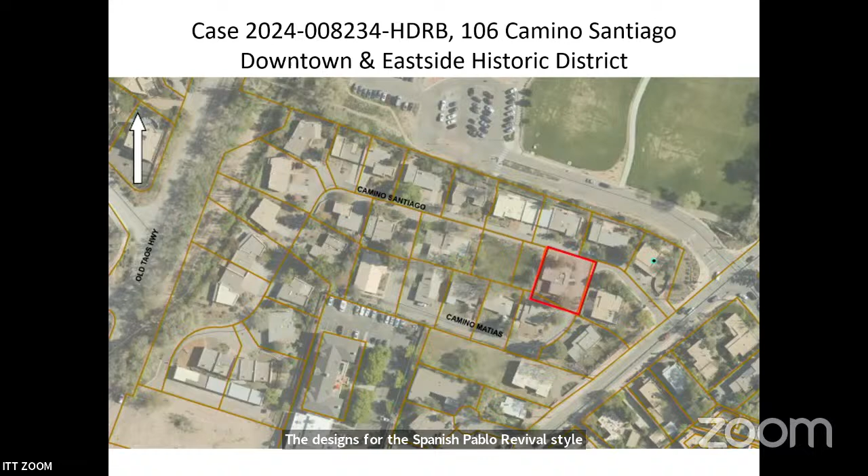106 Camino Santiago is located in the Plaza del Monte compound in the northeast section. Plaza del Monte is a unique compound in the downtown and east side historic district. The communal living center was originally developed for retired members of the Presbyterian Church, starting in the late 1950s until 1977. The designs for the Spanish Pueblo Revival style buildings, with mid-century modern design features, are from Clark and Register.

The circa 1965 residence at 106 Camino Santiago was constructed as part of the independent living section of Plaza del Monte, and is likely the 3rd unit to have been constructed. The contributing structure is a 2,301 square foot L-shaped residence with a portal that wraps around the north and east elevations, and has an attached carport on the southeast corner. The structure is flat roofed with a stucco chimney in the northeast corner. The portal is constructed of vigas sitting on square girders held up by round posts with zapatos-type corbels.

Small rectangular windows penetrate the bedroom wing. The remaining windows vary, including large picture and grouped casement and sliding units. The house is finished with textured cementitious stucco in a light brown tone, and white paint under the portal. There's a small courtyard in the southwest corner of the residence, and the residence represents the original Clark and Register design template for the Plaza del Monte retirement homes.

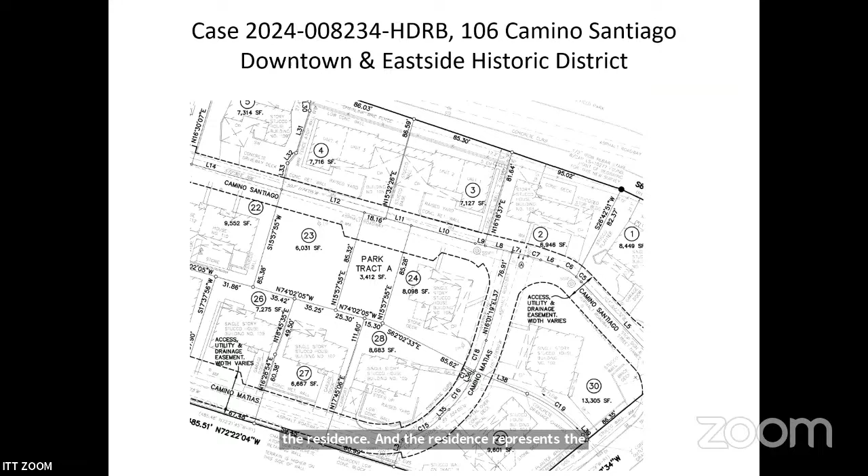The residence came before the HDRB under case H-19-098A for a status review, and was designated contributing because the structure is a good example of mid-century modern Santa Fe style, and because of its association with Plaza del Monte, a master plan community by architects Clark and Register. The north and east elevations were designated as primary under the same case, and approval to re-roof the residence was issued in January of 2024.

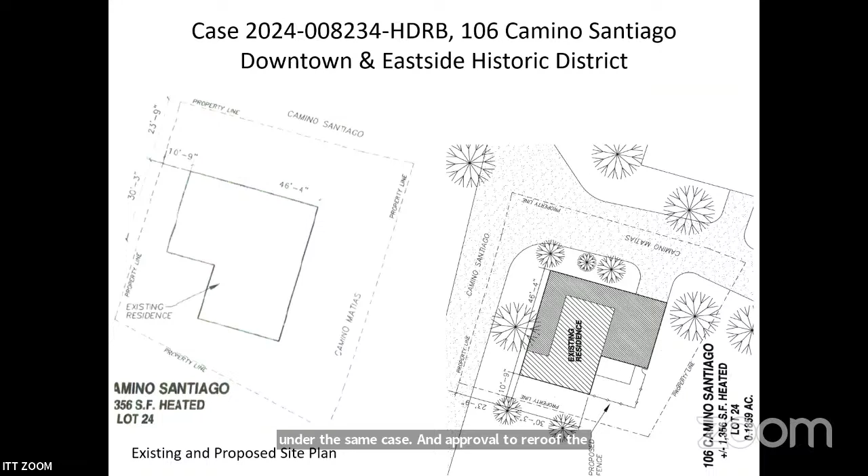The applicant now proposes the following exterior alterations.

We will replace all windows with sliders. The proposed windows have a single center vertical mullion with bronze trim. Window fenestrations will remain the same except for 2 windows, one on the west and one on the south. These 2 windows will be increased in size to meet egress requirements. The new egress windows will not have the same muntin pattern as the long narrow windows on the west elevation.

Several existing windows are non-conforming with greater than 30-inch light openings. These will be maintained in all windows except the egress windows, where the light openings will be increased. An exception is requested to replace windows on a primary facade per section 14-5.2D5AI.

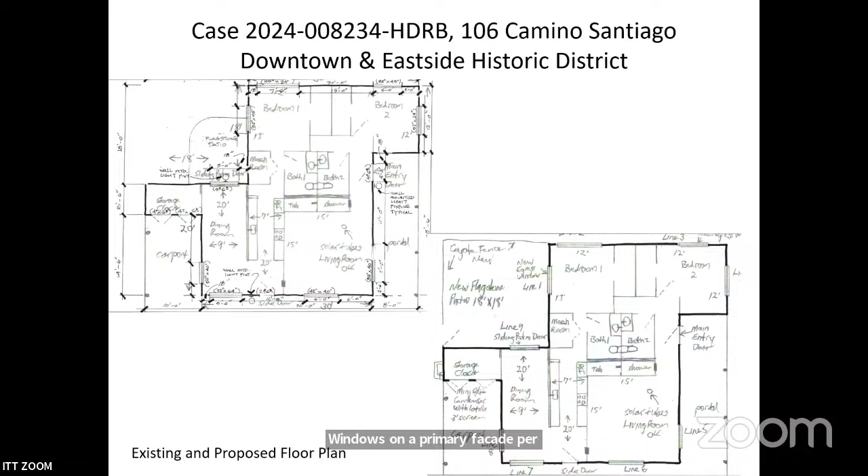They would like to replace the east elevation exterior 3-light panel door and the single pane glass sliding rear patio door on the west elevation with similar styles in bronze color.

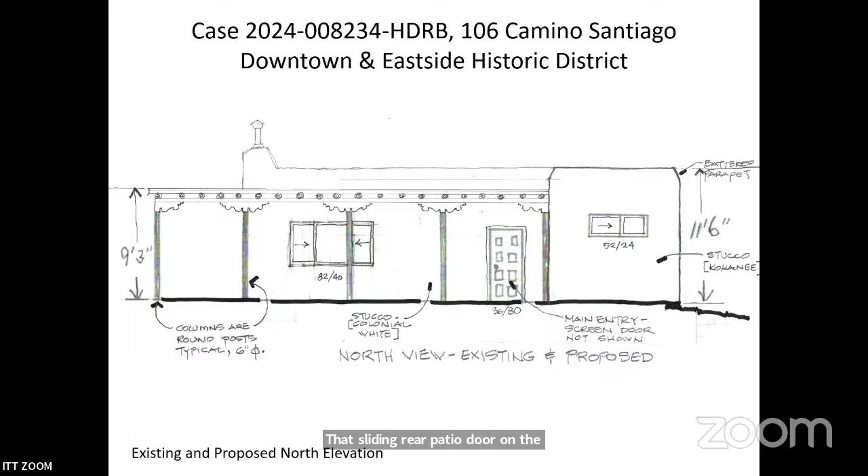Replace the 14 columns on the portal with 6-inch by 8-foot posts stained in dark brown called Cabot Gold Midnight Mahogany. An exception is requested to remove historic material per section 14-5.2D5B.

Repair the vigas of the portal using epoxy and staining to match the existing color, and they will retain the round shape.

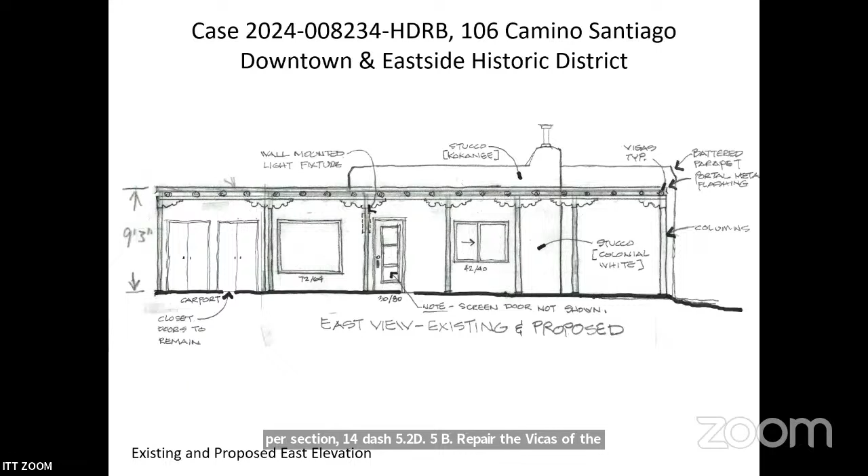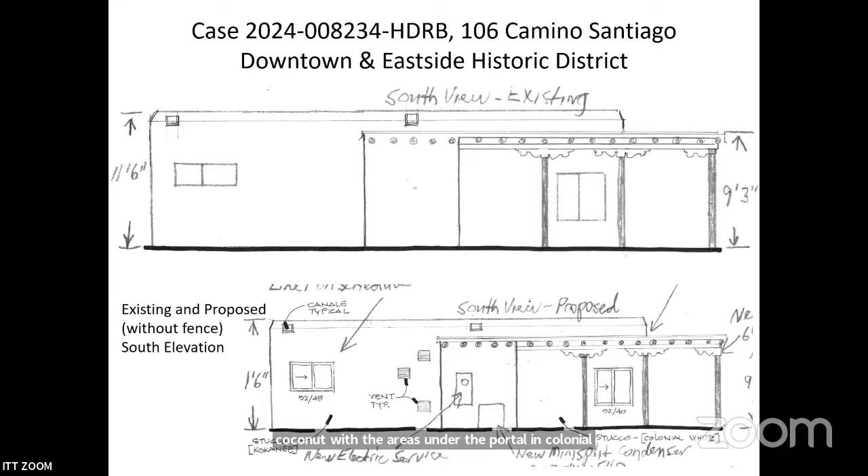Stucco the residence using La Habra cementitious kokanee, with the areas under the portal in colonial white to match the existing colors. Install a 324 square foot flagstone patio in the southwest corner of the residence in Colorado red flagstone.

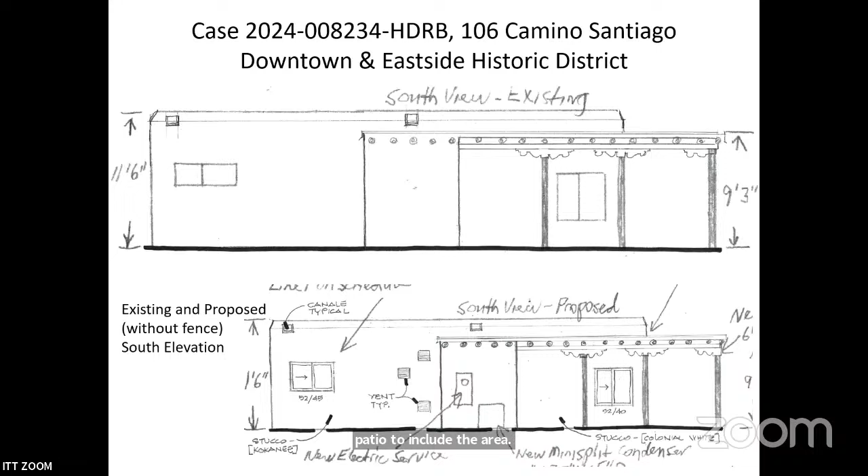Construct a 5'6" or 66" fence with a pedestrian gate along the south and west edges of the patio to enclose the area. The fence and gate are at the rear of the residence, where the maximum allowable height is 30 inches or 2 feet 6 inches.

They would like to install a ground-mounted HVAC condenser on the south of the residence and install a 3-foot-high coyote fence around the proposed HVAC condenser to conceal it from public view.

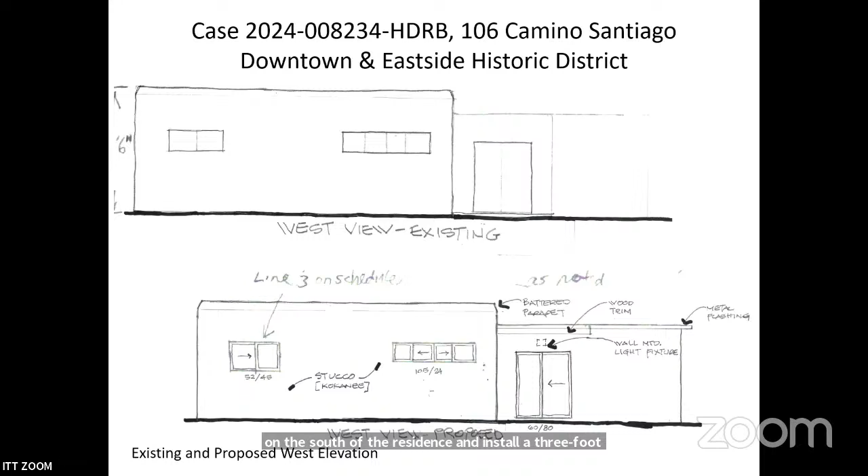Staff finds that the exception criteria have not been met for the replacement of the portal columns, and staff finds that the exception criteria have not been met for the window replacement, but the board may find that they have upon further testimony.

Otherwise, staff recommends approval of the application as it complies with 14-5.2D, general design standards for all H districts, and 14-5.2E, downtown and east side design standards. I stand for questions. Thank you very much.

Clarification: the present windows are wood windows, is that correct? Yes. And was there a window evaluation and what was the conclusion? There was a window assessment by Scott Cherry, and he found that all of the windows were in workable condition. They could be repaired. None of them were in bad enough condition to need to be replaced.

Today on the field trip, I did feel that some of the windows were in very good condition, actually. Would you agree with that? Yes, the report states them as all in excellent condition.

And is the applicant wanting to replace them with metal clad as opposed to wood? I can ask the applicant when he comes forward. Yes, please. I'm sorry. That's okay.

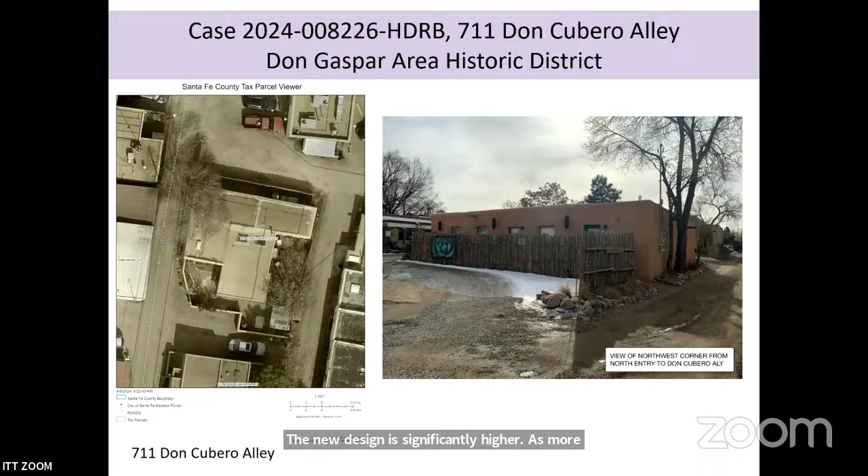Here we have the overview photo, the north elevation wall with coyote fence, and the east elevation with the coyote fence. The applicant is proposing, as a retroactive application, the construction of this 6-foot coyote fence on both the north facade and the east facade. Here we have the elevation of the south elevation showing the sunroom, and the west elevation showing the block wall into their courtyard.

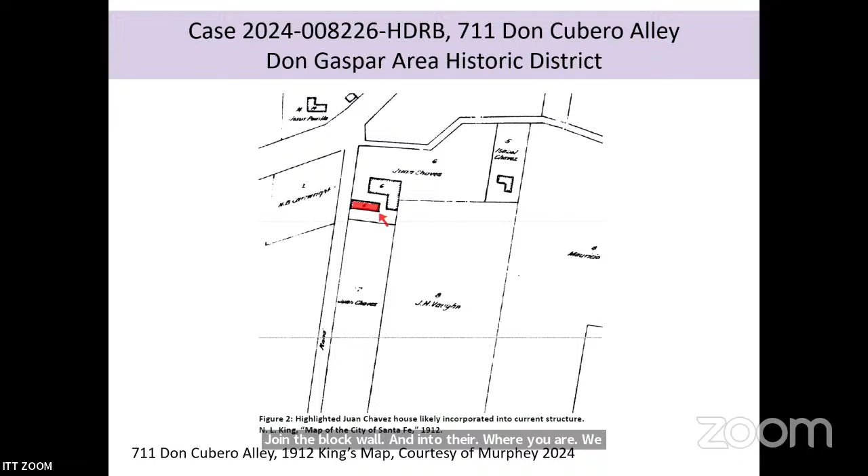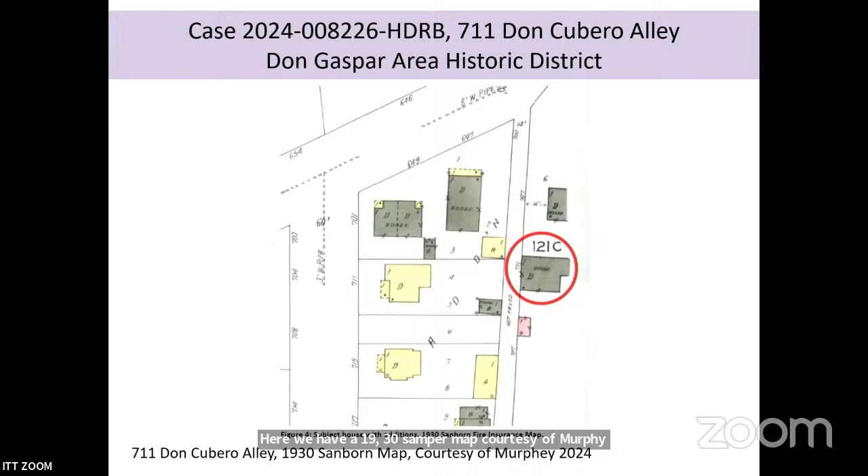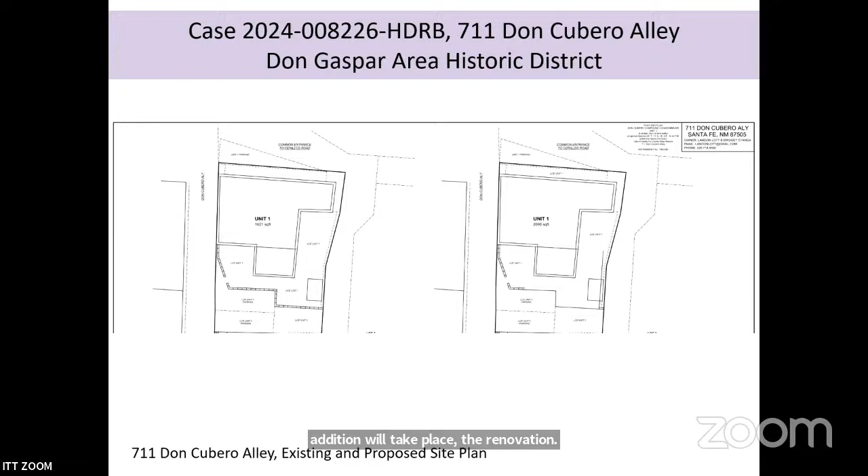Here we have the existing and proposed floor plans. There is no impact to the

northern primary facade, and all the work will be taking place where the existing sunroom is located, including demolition of the wall of the existing enclosed 224 square foot sunroom. It'll be remodeled to 225 square feet with a 14-foot high framed stucco structure using existing footings.

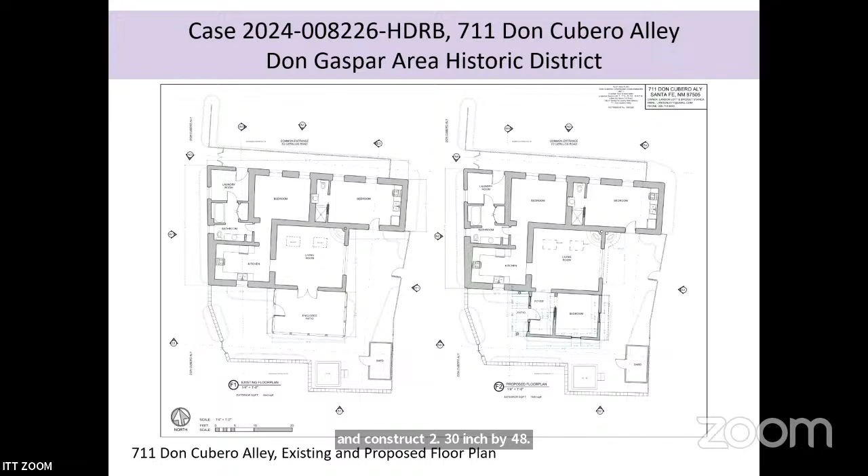The applicant proposes to reuse the existing front door and construct two 30-inch by 48-inch casement windows with colonial grid panels at 3 feet high from the ground on the west facade.

So here we have the northern facade, the existing and proposed elevations showing the coyote fencing. There will be no impact to the primary facade. Here is a section of the northern facade.

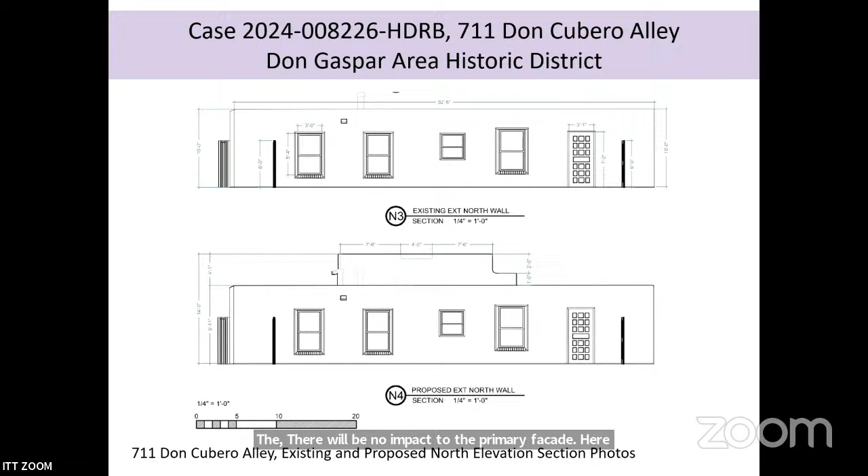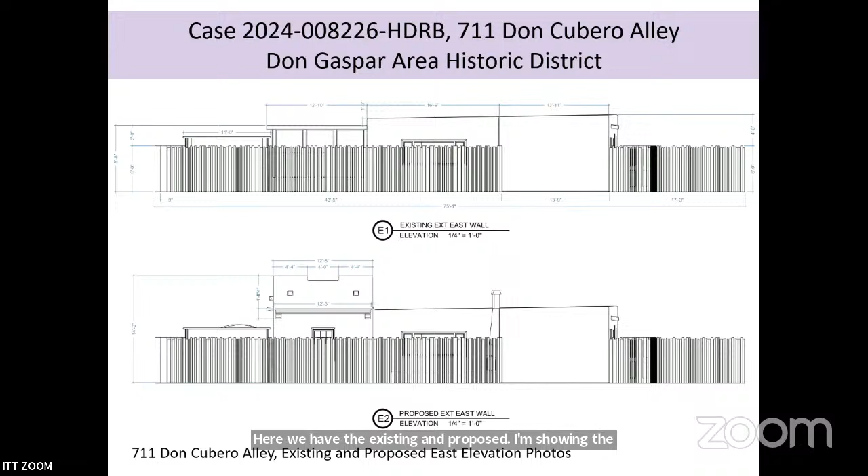Here we have the existing and proposed east elevation showing the coyote fencing as well, and the extent of the roofscape of the new addition. Here we have the existing and proposed east elevation section photos. This shows the overhang.

Construct a 16-inch high by 12-foot wide by 2 feet deep back awning and decorative historic corbels on the east facade.

Construct one 30-inch by 30-inch casement window with colonial grid panels at 4 feet high from the ground on the east and south facades. Here we see that colonial grid window, along with 2 canales, rounded parapets with fenestration, as well as a kiva fireplace in between the eastern facade and tucked in with the southern facade in that corner.

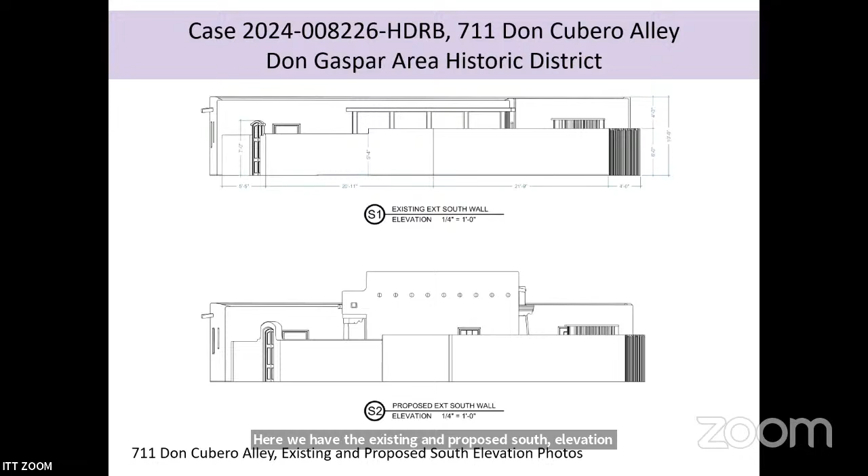Here we have the existing and proposed south elevation overview photos with the wall. Here we have the existing and proposed south elevation section photos showing the new addition with the 30 by 30-inch colonial grid windows, the vigas, the elemented vigas, canales, and kiva fireplace.

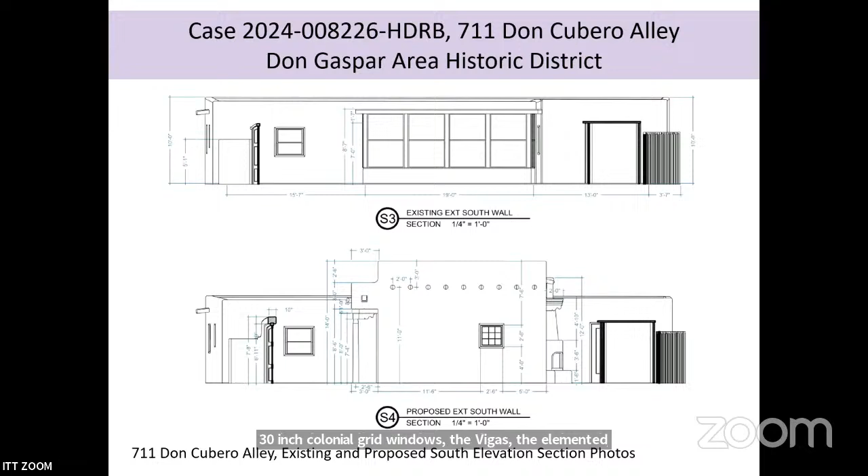Here we have the existing and proposed west elevation photos showing an overview of what the structure looks like. Here we have the existing and proposed west elevation section photos showing the construction of the 30-inch by 48-inch casement windows with colonial grid, the viga elements, the wooden door, and the rounded parapets with fenestration and canales.

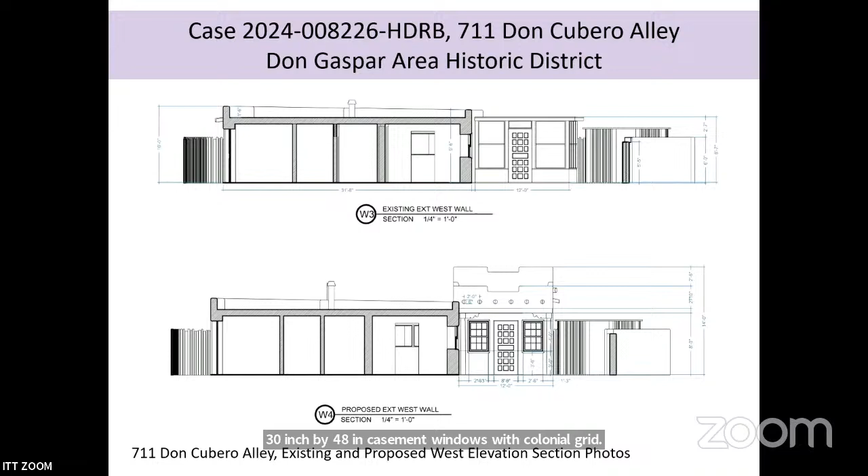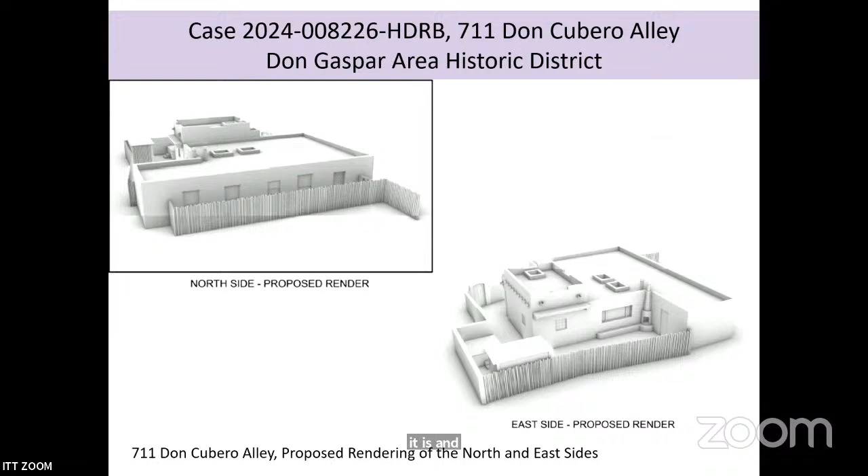Here is a proposed rendering of the north and east facades, which I believe the applicant did a really good job on. And here is a proposed rendering of the south and west facades.

Staff does not recommend approval of the proposed project, but upon further testimony of the applicant, the board may find that the application complies with section 14-5.2D, general design standards for all historic districts, and 14-5.2H, Don Gaspar area historic district design standards. Staff stands for questions. Thank you.

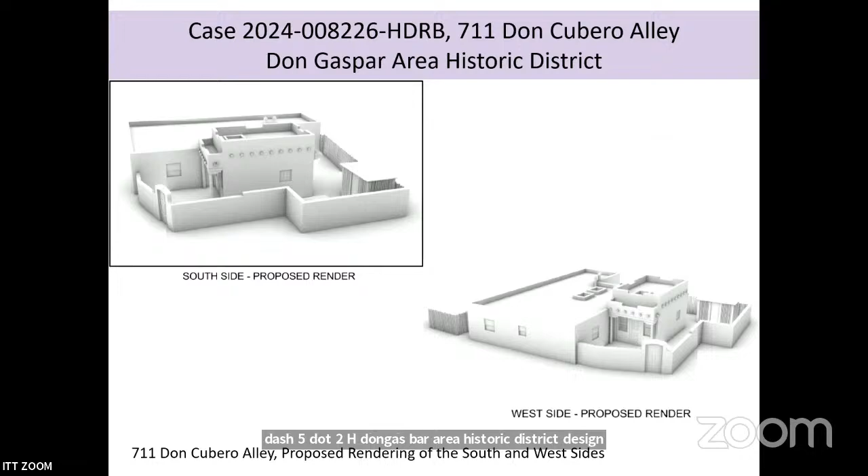Thank you, Paul. How much taller is the proposed building in relation to the existing building? Madam Chair, approximately 4 feet. And is the proposed building the same size, the same footprint as the sunroom? Madam Chair, that is correct.

Do you know the interior ceiling height of the proposed building? Madam Chair, I believe the existing height at floor level in that sunroom is 11 feet. From 11 feet floor to ceiling? And so this would be a clerestory, something that added 3 feet.

Thank you. Other questions? Member Guida? Thank you, Madam Chair. Thank you, Paul. So just a question for you, Paul. I may agree with your design assessment of what's being proposed on many fronts, but does the project otherwise meet the district standards? Chair Rios, Member Guida, it does.

And that would be inclusive of the windows on the wall where there's the portal, that we're not violating the distance from the corner rule in that case? Chair Rios, Member Guida, that is correct. Okay, so no exceptions would be required. We're meeting district standards and that's objectively true. Chair Rios, Member Guida, that is correct. Thank you.

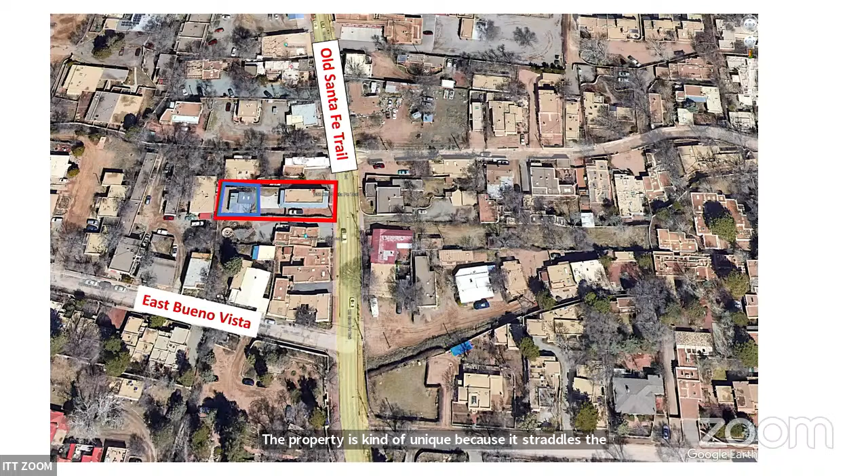This is a case for a downgrade from contributing to non-contributing for an accessory shed at 650A Old Santa Fe Trail. The property is unique because it straddles the Downtown East Side and the Don Gaspar Area historic districts. The shed is actually in the Don Gaspar Area Historic District. The site is shown here outlined in red, and the shed to the west under consideration for downgrade is outlined in blue. The shed is contributing to the Don Gaspar Area Historic District, and the east facade is primary.

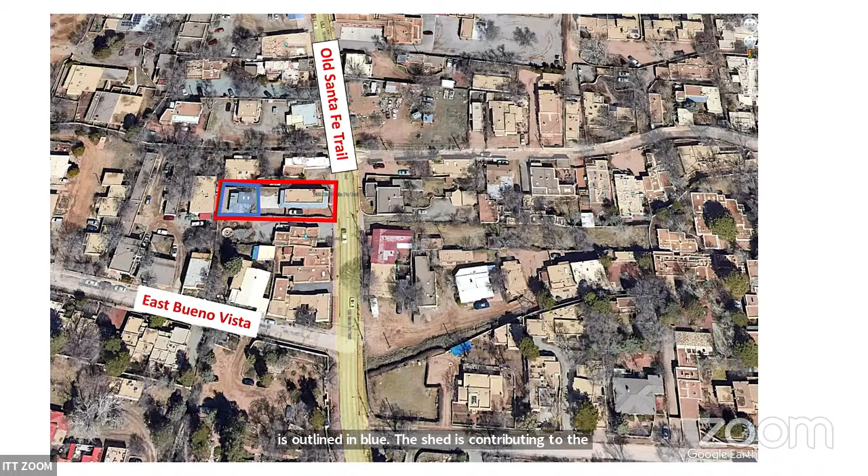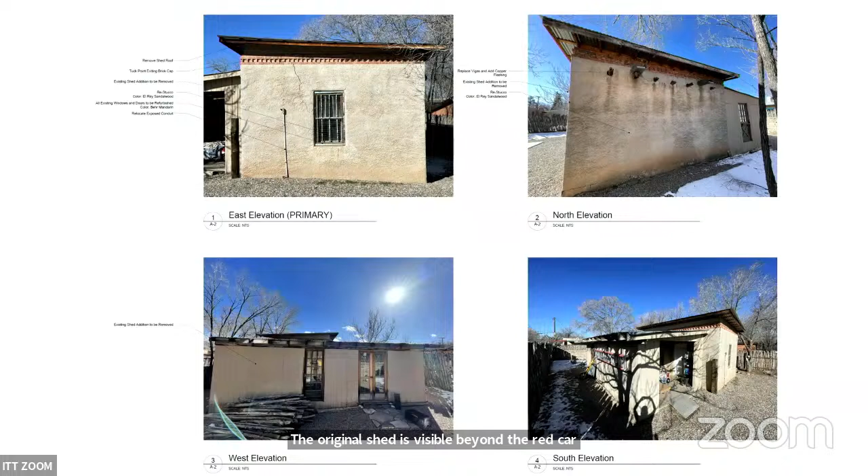These are photos of the existing shed's elevation. The original adobe structure is estimated to have been built between 1912 and 1928. The wood additions and the shed roof added to the top were estimated to be constructed in the 1980s.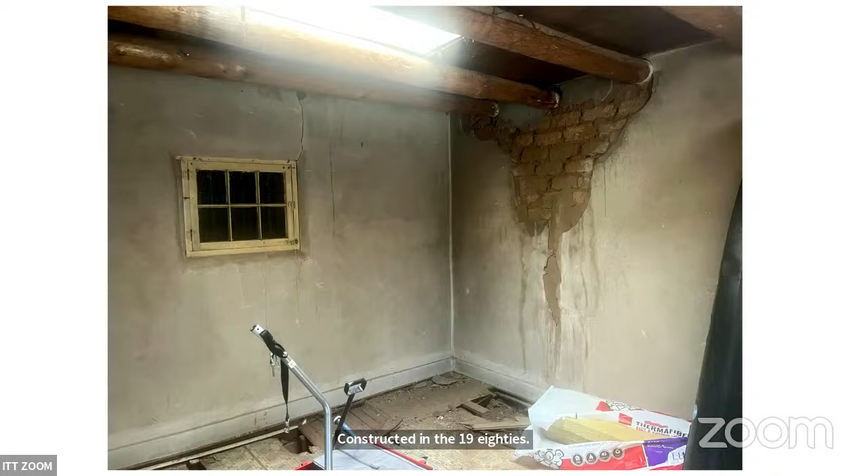This is a shot of the interior of the original shed, showing the Viga and adobe construction.

You may recall this structure was brought before the board in February, when the applicant put a lot of work into trying to squeeze in an additional dwelling unit, keeping the original primary facade and adding a second story. That case was denied due to height restrictions. The board at that time suggested he might want to come back with a case to downgrade the contributing status, which would give him more freedom to make renovations. But it's my understanding he still intends to keep the original shed structure.

As the structure has very limited public visibility from Old Santa Fe Trail, and none from the Don Gaspar Area Historic District to which it belongs, staff recommends the historic status of the structure be downgraded to non-contributing, per 14-5.2C, designation of significant and contributing structures. With that, I can take questions.

Thank you, Ramon. Would you kindly put up the photo? This is interesting—part of this property, the home, is in one district, the Downtown East Side, and this building we are looking at, the shed building, is in the Don Gaspar area.

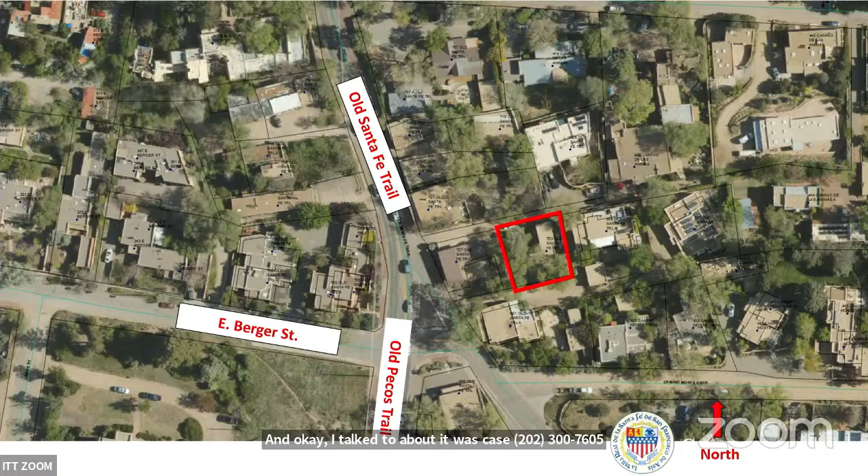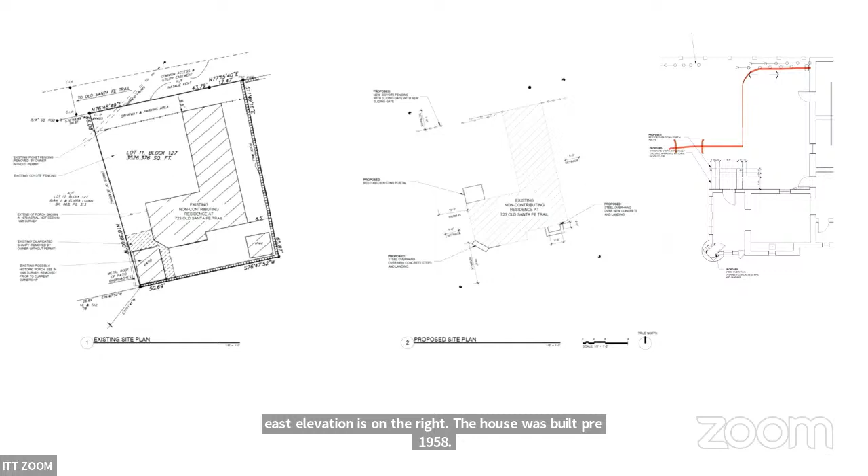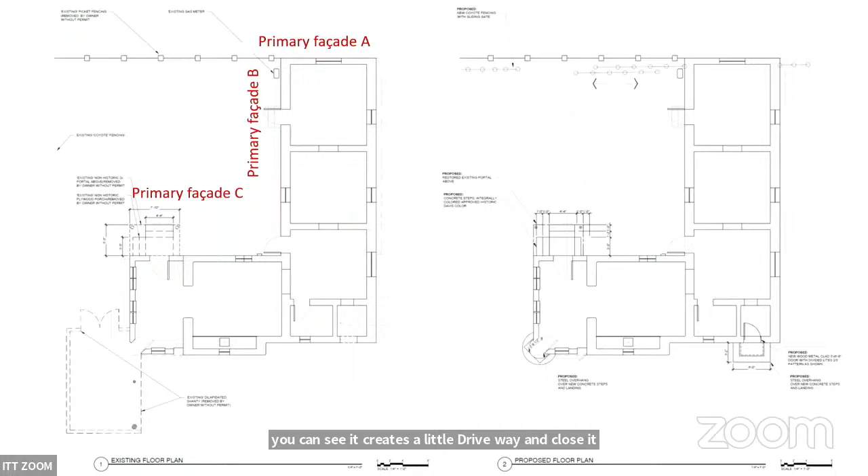The existing site plan is on the left and the proposed in the middle. A revised location has since been submitted for the fence, shown in the diagram on the far right, which creates a small driveway and encloses part of the property. The existing floor plan is on the left and the proposed is on the right.

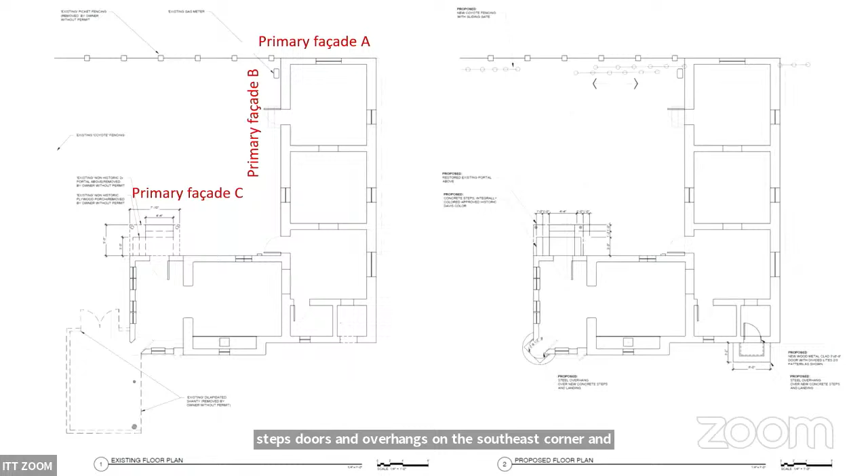The entry portal on the north elevation will be rebuilt and include new concrete stairs, new concrete steps, new doors, and new overhangs on the southeast corner and the south facade. On the existing diagram on the left, you can see the primary facades, labeled primary facade A, B, and C.

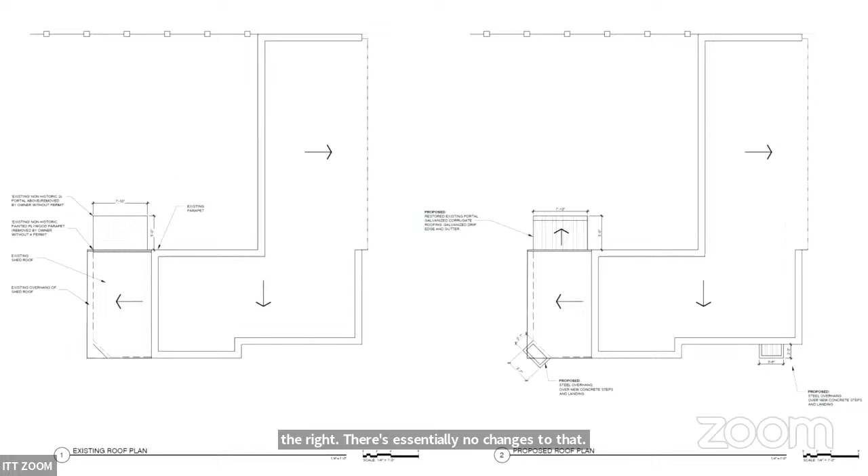The existing roof plan is on the left and the proposed is on the right. There's essentially no changes, with the exception of overhangs over the two new doors. The portal will be rebuilt in the same dimensions as the one that was removed.

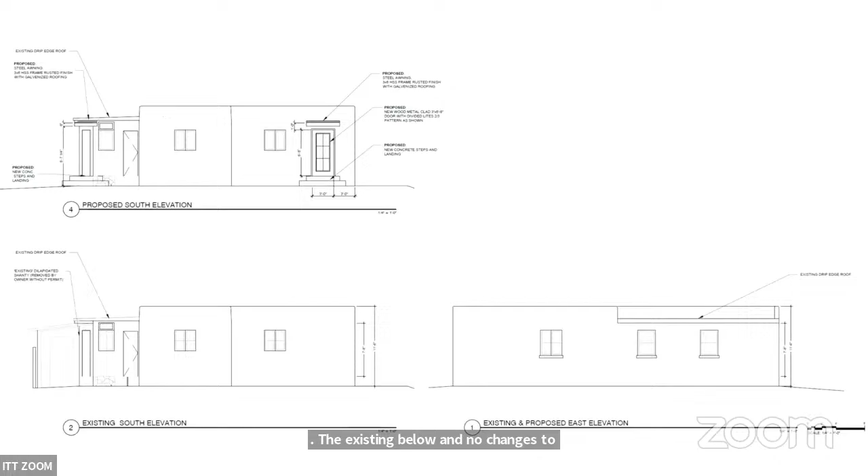Staff recommends approval of the proposed project and finds the application complies with section 14-5.2D general design standards for all historic districts and 14-5.2E downtown and east side design standards. Staff has determined that the max coyote fence height to the north of the site should be 53 inches.

That concludes the presentation; I can take any questions. Any questions for Ramon, board members? They don't want to talk to you, Ramon. Tonight's my lucky night, Madam Chair. We'll go to the applicants.

Applicant or applicants, please get sworn in. Will you please raise your right hand, state both of your names and your street address? Jeb Mirando, 1301 Declovina Street. Christoph Eagleton, 723 Old Santa Fe Trail. Do you both solemnly declare and affirm that the testimony you give in reference to this item shall be the truth and nothing but the truth, under the penalties of perjury?